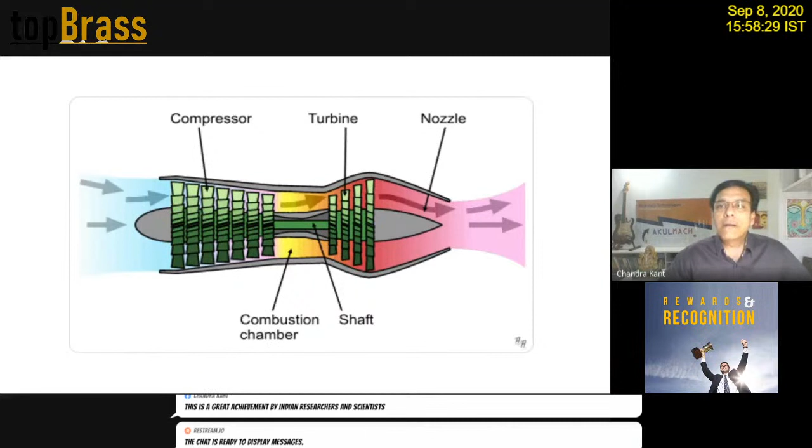So the enemy will not even have time to react, because this is a medium range missile and it can fly very, very fast. There is no system which can stop it. How is this speed achieved? But before we go to the hypersonic drive systems, let me tell the viewers that the whole thing is based on something called scramjet.

So what is a scramjet? We will come to that in a minute, but let us understand how the normal aircraft turbine engine works. So as you can see here in this diagram, this is a very simple diagram of a jet engine.

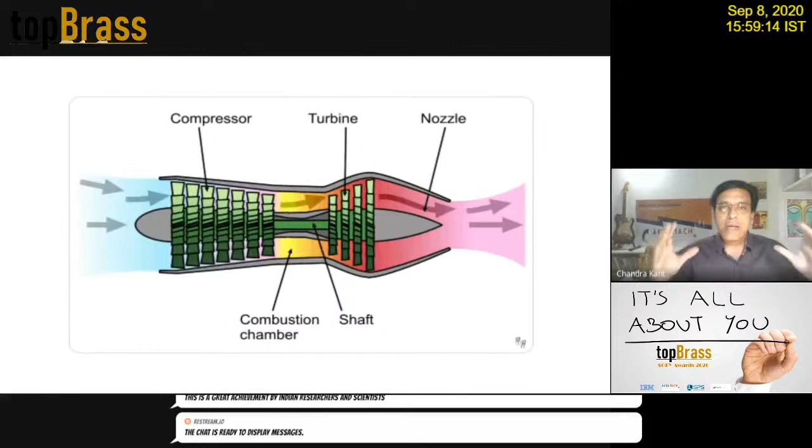It has something called a compressor at the start of the airflow, and as you see when you fly on jet planes, I'm sure everyone has seen there is an engine with a big frontal side as an entry point for the air. So this is exactly what it is. The air enters from here, and these are the compressors.

These fans operate in different stages, and when the air passes from one to the other, the rate of compression is increased every time it passes through the stages. So this is a low compressor propeller, and as the air passes through all of this, it becomes a high compressor. The last one is the highest compression. So you can achieve a very high compression of air inside the engine.

Now over here, as shown in the diagram, is a combustion chamber. So the fuel is injected here, and it is ignited. Once the fuel is ignited, it expands vigorously, and hence it will escape from the other side. So this is really the heart of the jet engine, and this is how the engine works. It's a very simplistic diagram, but it has a lot of things. We are not covering all of that.

But as the hot air is escaping the engine, there is something called a turbine. These turbines are connected via a shaft with some of these compressors. So the hot air actually spins the turbines, and once the turbines are spinning, they are connected with this green color shaft with some of these compressors.

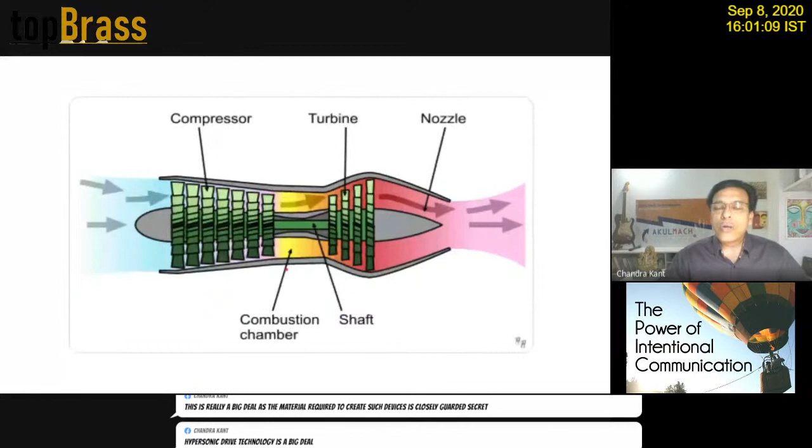So this jet engine, once it attains a certain speed, becomes a self-sufficient system. That means it does not require any external help. The incoming air will get compressed automatically as long as you keep injecting the fuel and igniting it. The jet engine will keep running once it attains a certain speed. So this is a very simple diagram of a jet engine.

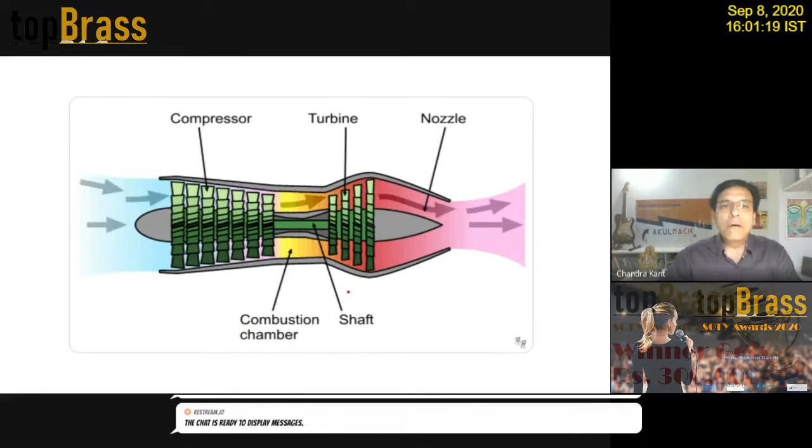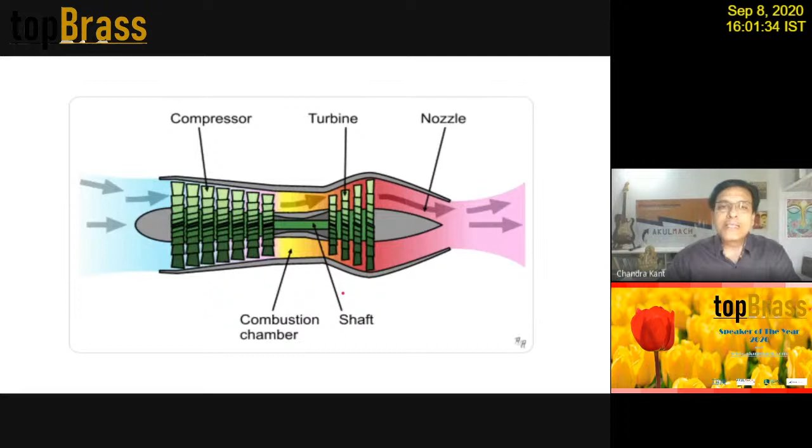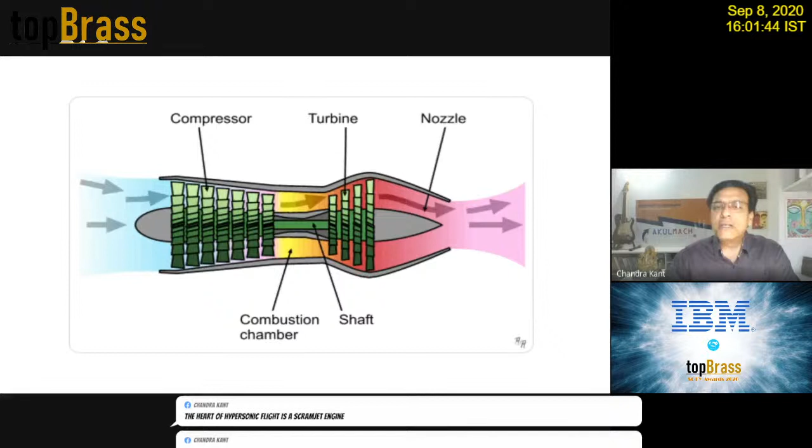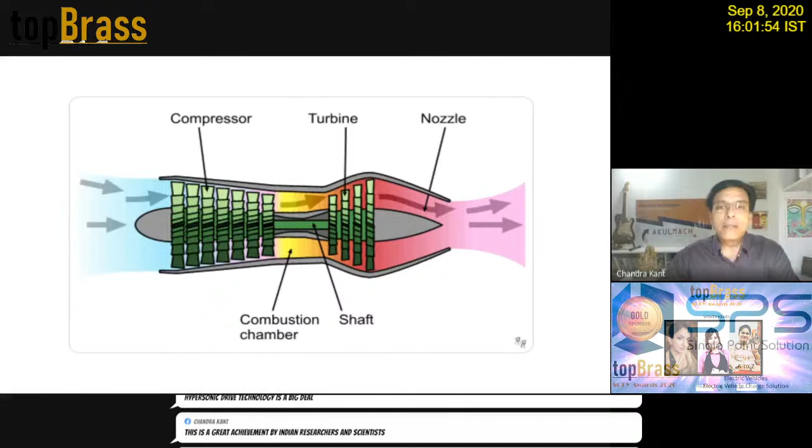Now, a jet engine can take you anywhere between 800 kilometers or 500 miles per hour to upwards of 2.5 or 3 Mach. Today's jet engines can fly fighter planes at very high speed, up to 2 Mach to 3 Mach. But after 3 Mach, the jet engine cannot withstand the pressure and the stress which can be seen at that speed. So you need something different, and the answer comes in the form of something called a scramjet.

Now you would wonder, what is a scramjet? A scramjet is a piece of empty tube which has the air entering from one side at supersonic speed. So the first requirement for a scramjet to function is that the air coming through the intake should already be at supersonic speed. That means the air movement itself should be very, very fast.

And once this is moving inside the engine, it has no moving parts, and you just spray the fuel and ignite it. Once the fuel is ignited, it is thrown out of the exhaust at very, very high speed. So the air is already supersonic when it enters this scramjet, and when it exits, it is expanded. It has a lot of fuel exploded inside the engine, and it is now propelling the aircraft at upwards of 5 Mach. So this is the principle of a scramjet.

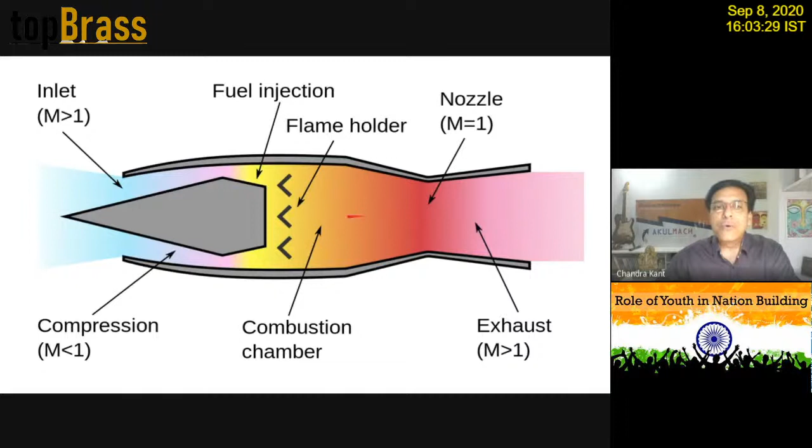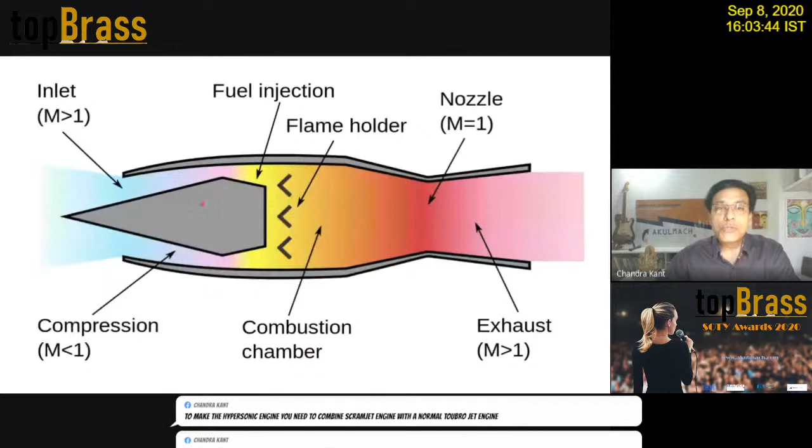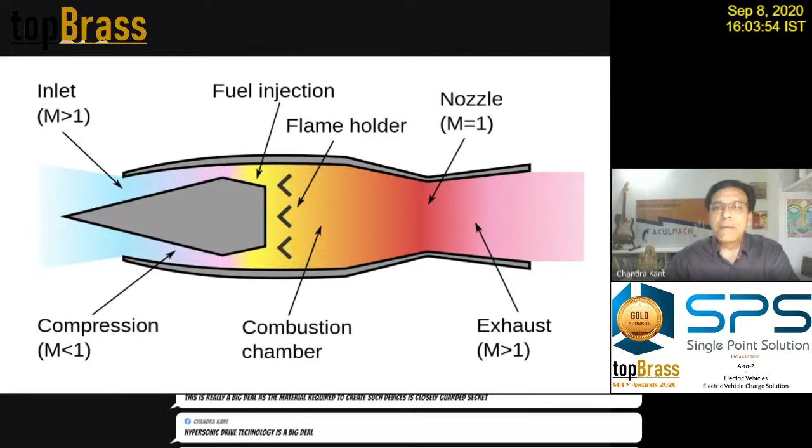Very simple device, but it has a lot of things which are required. Now you can see scramjet has been made by India, and only 4 countries have made this technology, simply because the material required for building a scramjet to handle these stresses, the temperature and the speed at which it flies are closely guarded secrets. The metal and the alloys used to make scramjets are very, very secret, and none of the countries who got this technology is sharing with others. So this is really the background. But then how do you make sure that you have a viable solution to fly?

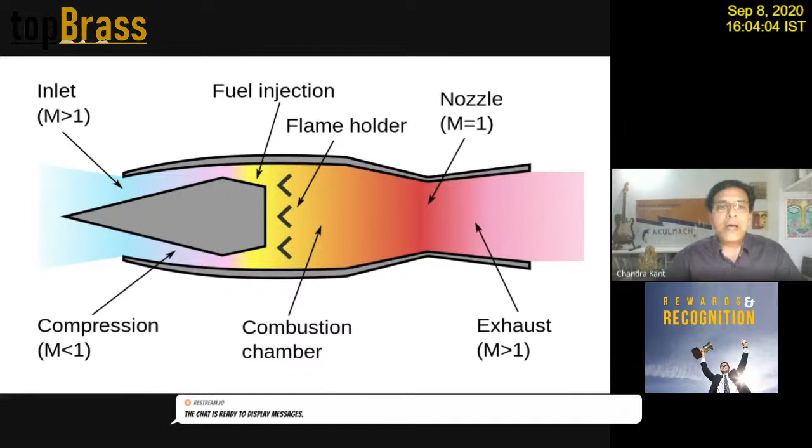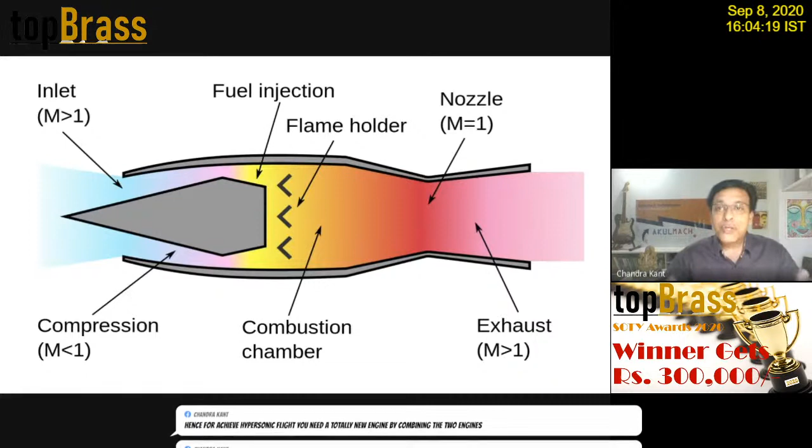So once you say that, hey, I know the principle of scramjet, I know the principle of a jet engine. Jet engine is also a very, very difficult thing to make. It's very, very high tech equipment. And now India is saying that we've got the hypersonic flight. That means the hypersonic engine is indigenously developed by India.

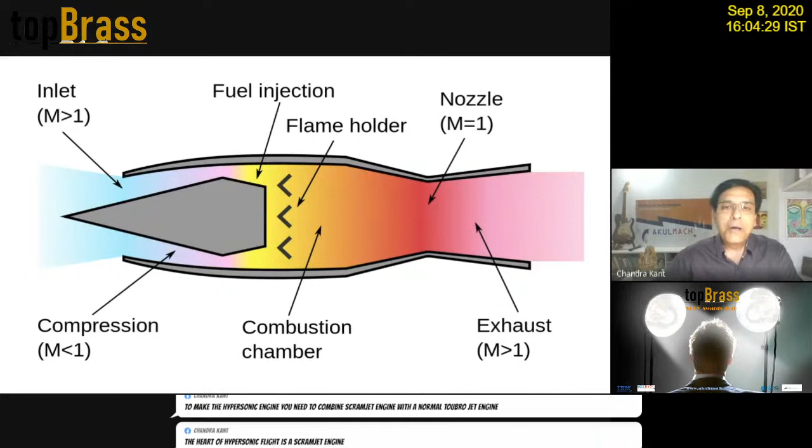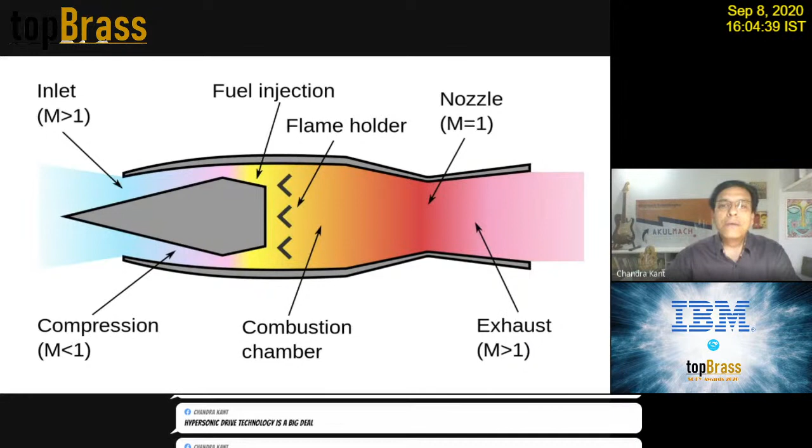So what it takes to make a viable solution? The viable solution is to basically combine a jet engine with a scramjet, and that will ensure that the air, when it enters the engine, is already at the supersonic speed to make the scramjet kick in. So in the next diagram, I'm showing how this actually functions.

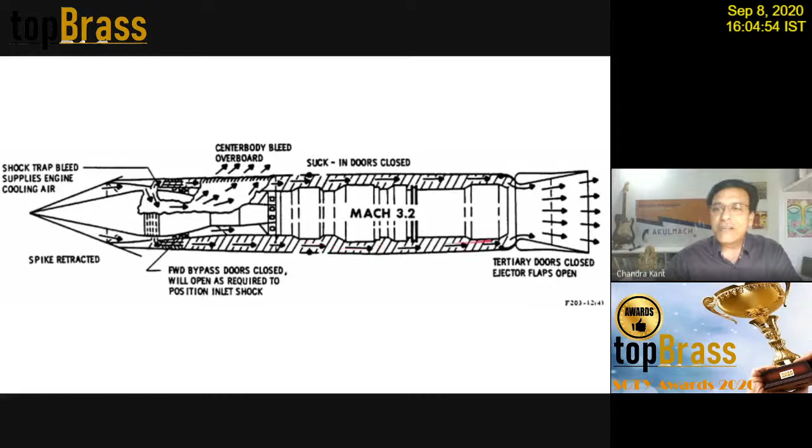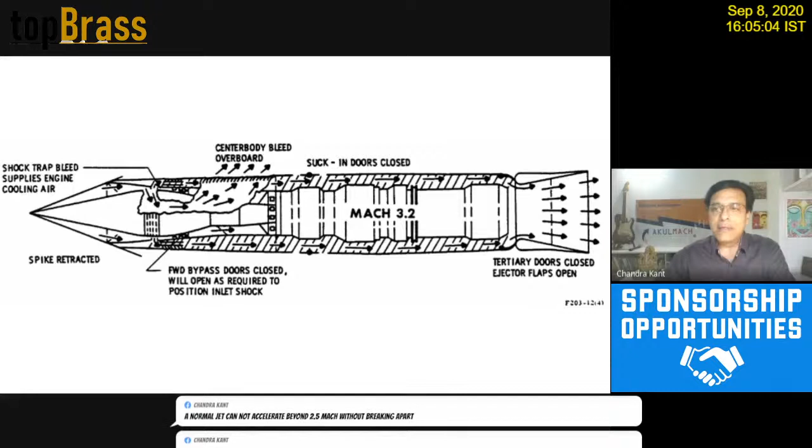Now, as you see, it's a combination of scramjet, and this is the jet engine inside this scramjet. So the jet engine is working normally as it would function. That means it has a compressor, it has an ignition, and then it has an exhaust. But the jet engine will fire, take the aeroplane into the sky, and give it a speed of more

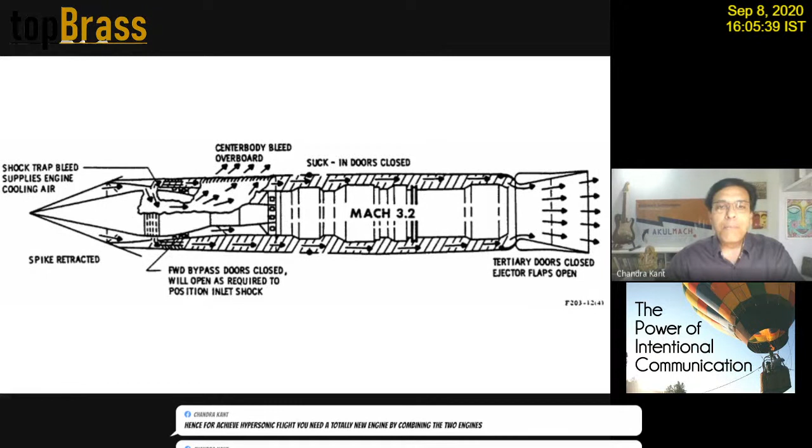than Mach 2. Now, when the aircraft is flying at Mach 2, the air which is coming inside the engine is already at supersonic speed. And that is the time when you can kick start the scramjet to propel your aircraft to further distances at a very high speed. So, by combining the jet engine and scramjet technology, you can achieve speeds upwards of Mach 5.

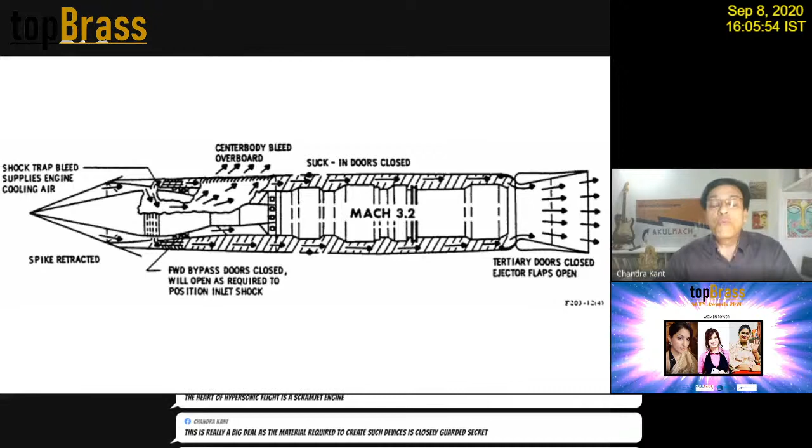People are saying that with the current technology which is available in the world today, you can go up to Mach 15. So it is very, very high speed. Now, if you compare that with India as a country, you take a flight and you have to fly from one end of the country to another. It takes about 5 to 6 hours, roughly, with the normal turbofan engines.

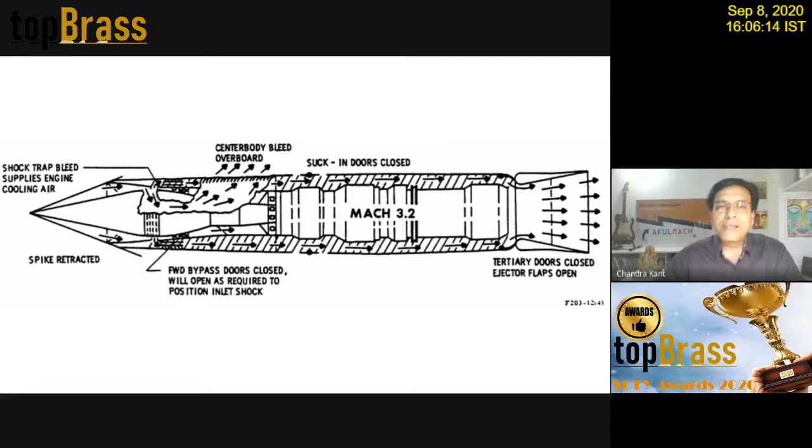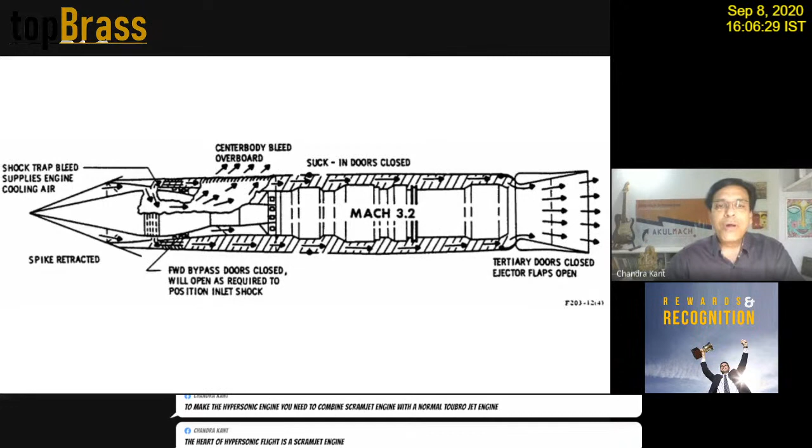But if you have a scramjet fitted in your aircraft, you can cover the entire length and breadth of India, top to bottom, in less than an hour. So you see how much time saving you can do if you have this kind of technology readily available. And that is why it is such a big deal that only 4 countries have this, and India became the 4th one yesterday.

And this is not something new for the world. The United States of America has been flying this Blackbird. It is called Black Beauty. It is the fastest flying aeroplane which was produced. It's called SR-71 Blackbird, and this was basically developed during the Cold War era.

And when the Russians tried to detect it and fire upon it using surface-to-air or air-to-air missiles, this aeroplane was flying so fast, it did not carry any defensive weapons on board. All it had to do is, when they see a missile coming towards them, they just speed up and escape the missile. So that is really the beauty of this technology: when your aeroplanes can fly at such a high speed, your whole defense paradigm changes completely.

If you have a supersonic or hypersonic missile system, systems like S-300 or S-400, and now Russia is talking about S-500, all of these systems, which are very accurate, are totally helpless when they have to stop a hypersonic missile. We already have a supersonic missile called BrahMos, developed in collaboration with Russia. However, now we got our own indigenous technology of having a hypersonic engine developed.